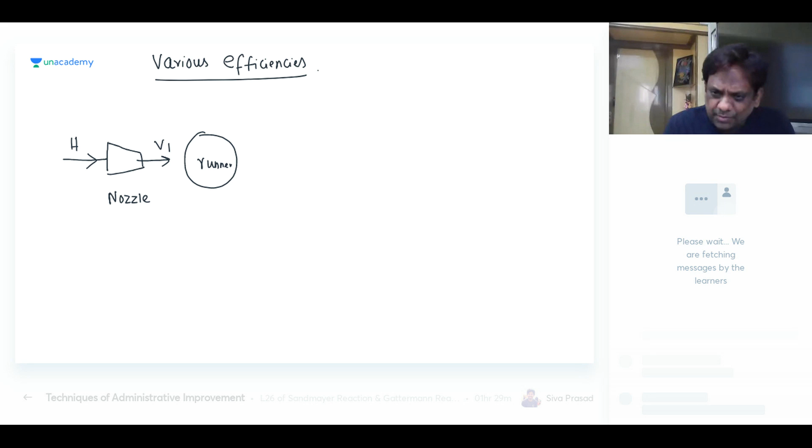From the nozzle, the fluid is entering the runner. I'm not showing the blades and all those details. This is the inlet to the runner. The runner is developing a power PR, and we call this the runner power.

Okay, this is runner power. From the runner, it goes to the alternator or generator, and finally this is my shaft power. So finally we have the output power, which is the shaft power. Now watch carefully.

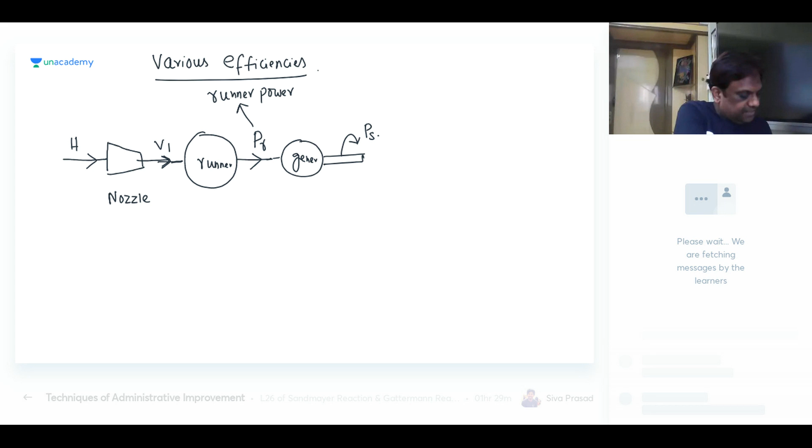Now I request everyone to stay cool and enjoy the class. Relax, relax. Okay, look carefully.

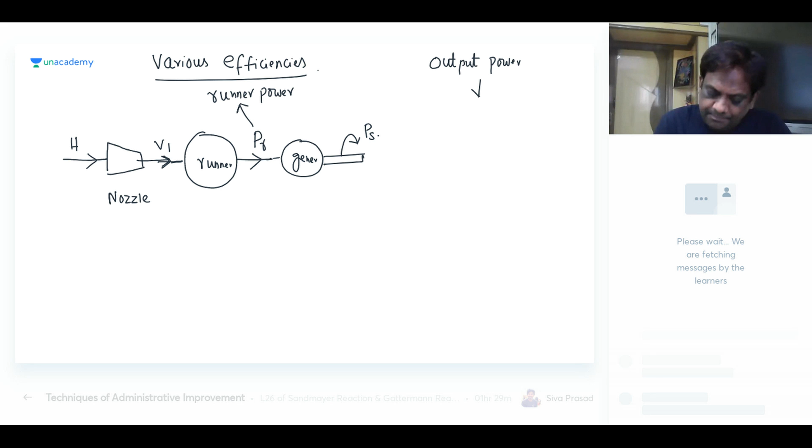Finally we are interested in, whenever we say turbine, it is the output power we are interested in. This is nothing but your shaft power. Okay, no problem, now look carefully.

I'll give you a simple example. What is the input? I already gave you that power is equal to WQH. I have derived this: power is equal to WQH. This is the input head, so therefore the input power will be equal to WQH. Now have a look at this.

There is one device, A, and there is another device B. Let us assume, I'm giving a small example: let the input to A be P1. Let A develop a power P2. And let B develop a power P3. No problem at all, B is developing power P3.

Now let's see, what is the efficiency of A, my dear students? The efficiency of A is output by input, that is P2 by P1. Now let's find the efficiency of B. For B, this is the input and this is the output, so therefore it will be output by input, that is P3 by P2.

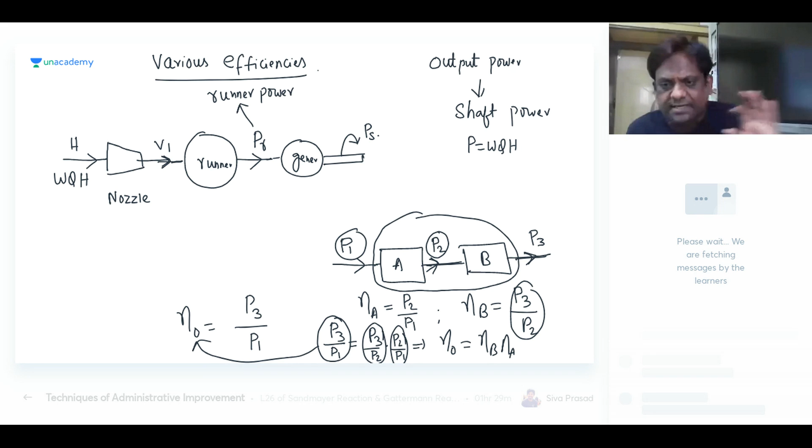My dear students, is this clear till now? Please tell me, till now is it clear? You are not saying anything. So I'll move ahead.

Look here, now watch carefully, stay calm. This is the nozzle, and the input is H, the head. So what is the input power? It will be WQH. You know well it is developing a velocity V1. Now where is this going? It is going to the runner, and the runner is developing a power PR.

Now I use one word, hydraulic efficiency. Now I am making every point crystal clear, but one must have patience for this.

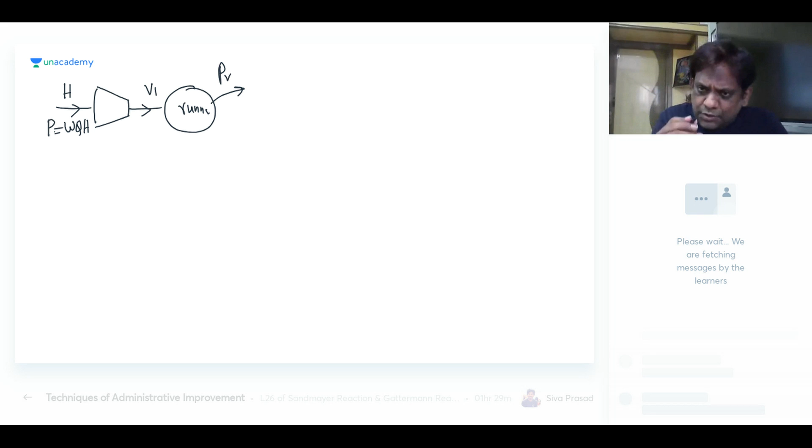Can you tell me what is nozzle efficiency? We have seen very clearly, for nozzle efficiency it is output by input. I will write this as V1 square by 2G as output head, and the input head is H. So this is my nozzle efficiency. I already explained this in my first or second class, I don't remember.

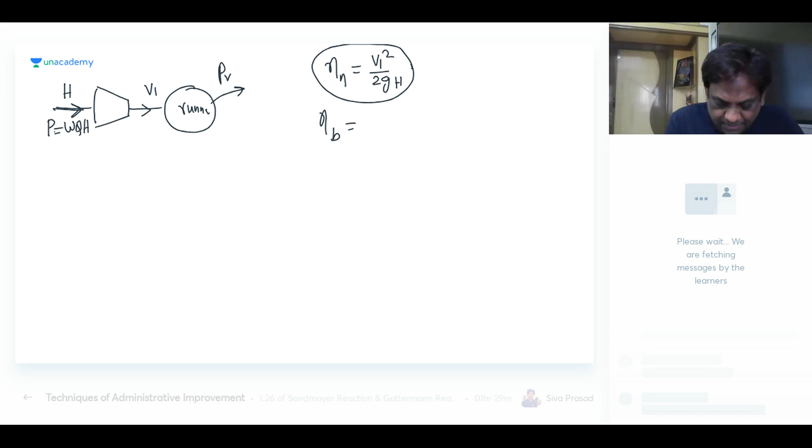Now, can anyone tell what is blade efficiency? I told you yesterday. This is the runner or blade. Runner or blade efficiency is the output. I want the blade efficiency of my runner. Where are the blades? On the runner. So it is known as runner efficiency or blade efficiency. The runner is developing power PR. So it is output by input. What is the input? Half M V1 square. We have already seen this. My dear students, is it clear? We have already seen this.

Now watch, I use one term known as hydraulic efficiency. Be a little careful. Now I use one term known as hydraulic efficiency.

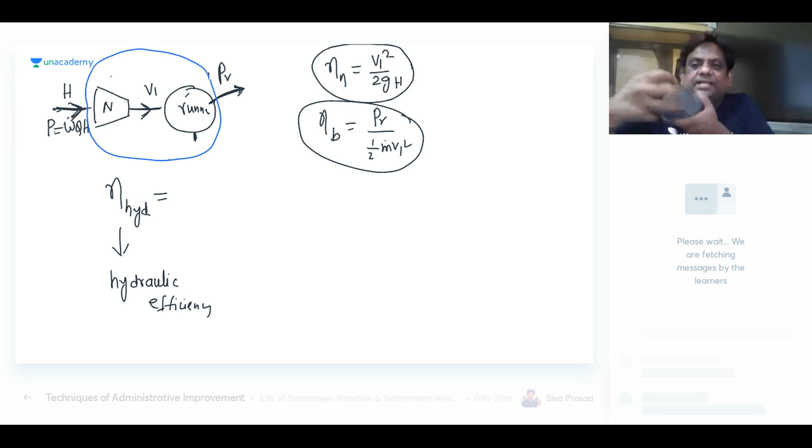That fluid will go. Now let us say this is the runner, so on the runner we have blades. It is developing power. So once it develops power, it causes the rotor to rotate. Once it rotates, what does it connect to? The generator shaft. Now output power will come from the generator shaft. There, there is no fluid action, it is all mechanical action. So that's why the hydraulic action is input to the nozzle. Then you may ask, sir, why are you taking the nozzle as part of the turbine? The reason is, in impulse turbines, we need a nozzle.

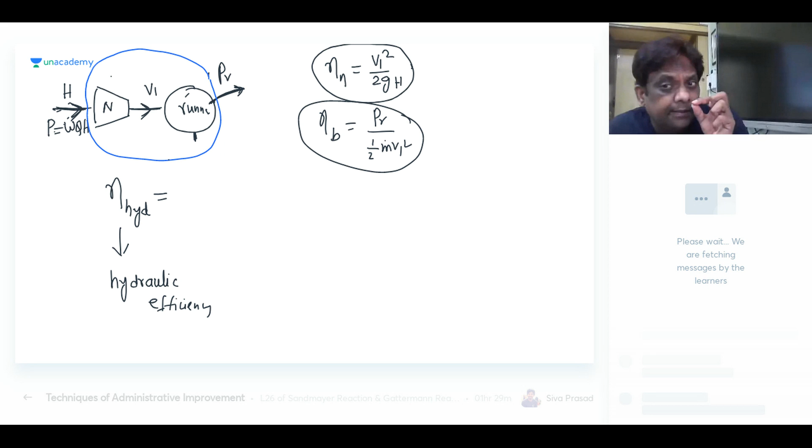Because of the nozzle, my complete pressure is converted to velocity, and with that velocity the fluid enters the runner blades. So this is the integral part.

Tell me about hydraulic efficiency, meaning this whole hydraulic action where fluid is entering and power is developed. What is the output power? It is the runner power. And what is the input power? This head - if this is power, then this should also be in power: P = WQH. And this is known as hydraulic efficiency.

This is known as what? Hydraulic. Why do we call it hydraulic? Because input is fluid action, and because of this fluid action, the power is developed. After this, we don't use the word hydraulic.

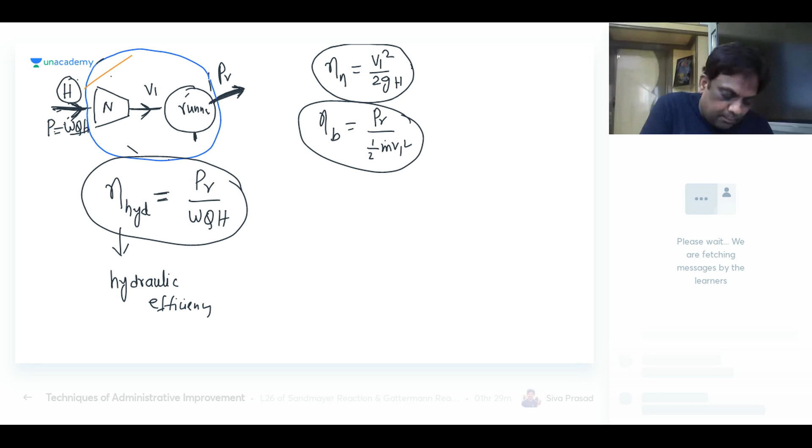Please observe, hydraulic efficiency is output from the runner. How much is the runner developing? PR. And what is the input that you are giving? Don't say sir this is the input - that is input for the blade only. For my complete turbine, I repeat, for this complete turbine, this is the input, and this is all fluid action. Because of the fluid motion only, the power is developed.

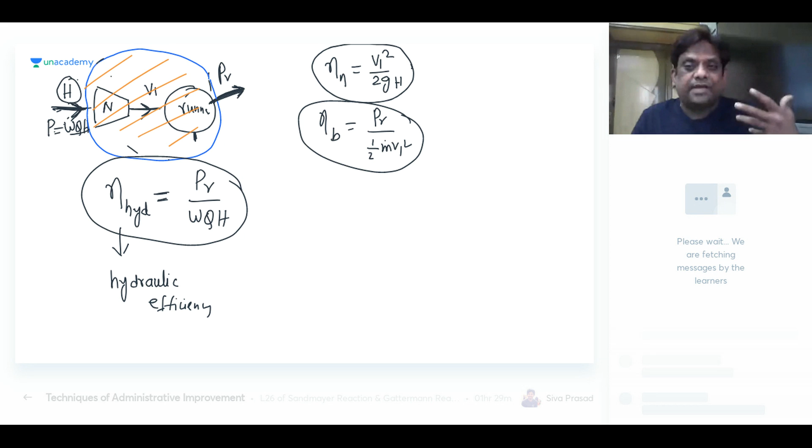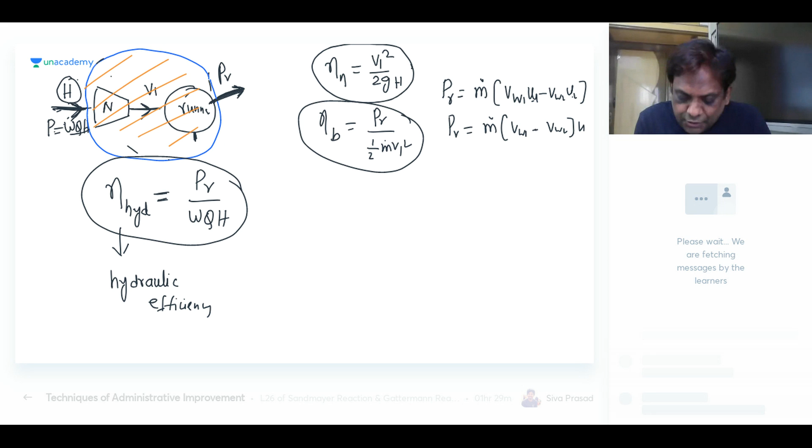That's why we call it hydraulic action or hydraulic efficiency. What is hydraulic efficiency? It is the ratio of runner power. Already I have derived runner power as M dot into, as I told you yesterday, VW1 U1 minus VW2 U2. But in Pelton Wheel, U1 and U2 are same, so take it out. So it will be VW1 minus VW2 into U. But I should write this as plus or minus. Why plus or minus? All this I had explained yesterday.

Please do not by-heart this. Today I'm going to do some questions wherein in one case it will be plus, in other case it will be minus. If a student is by-hearting, then they're gone. So please tell me, is hydraulic efficiency clear? You're not saying anything. Is hydraulic efficiency clear, my dear students?

Hydraulic efficiency clear? Yeah. Now, अब देखना. Udaya Rasakunda. Oh. Okay. Now observe here. Please observe here. Understand carefully. Okay, hydraulic efficiency is over.

Can I write this? Please observe, my dear students. Hydraulic efficiency has two components. Look here. This part is nozzle and this part is runner. So runner output, runner input - you call it blade efficiency. Nozzle input, nozzle output - nozzle efficiency.

But please observe, just now I gave you this. So this overall hydraulic has two components, nozzle and runner. So can I write hydraulic efficiency is equal to nozzle efficiency into blade or runner efficiency? Just now I have derived this. Overall, tell me sirs, is it clear, my dear students? All of you, is it understood? This is very, very important.

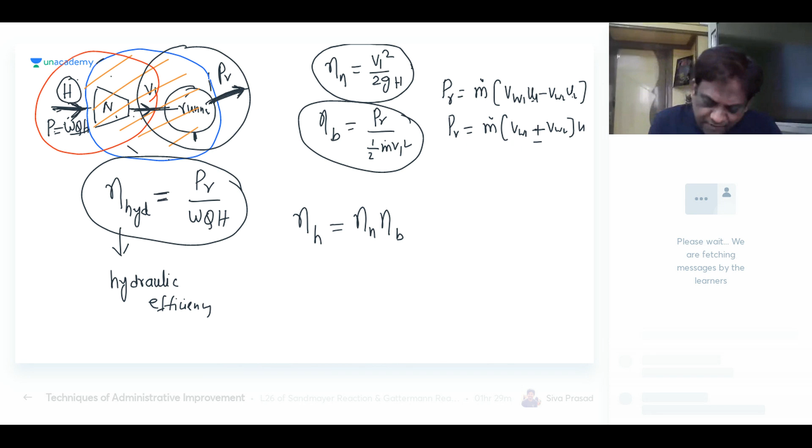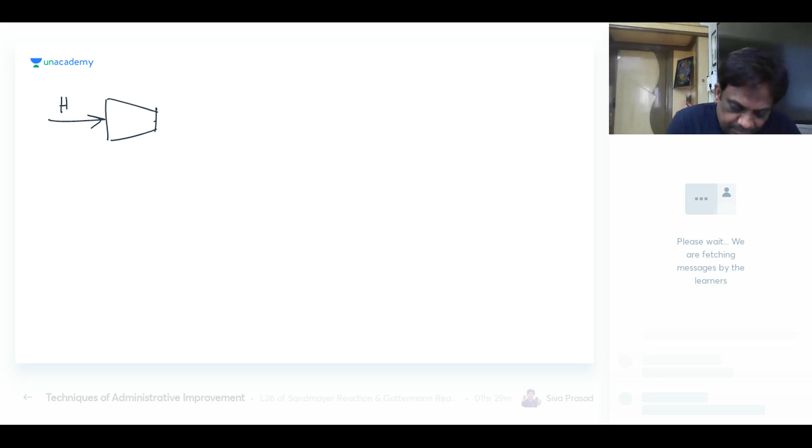Hydraulic efficiency is nozzle efficiency into blade efficiency. Let me tell you again, listen. This is the nozzle - this is the input, this is the output, this is the runner power. So output by input, this is blade efficiency. Output by input, this is nozzle efficiency. If you want total hydraulic efficiency, from this to this we call it hydraulic. Hydraulic is equal to nozzle efficiency into blade efficiency.

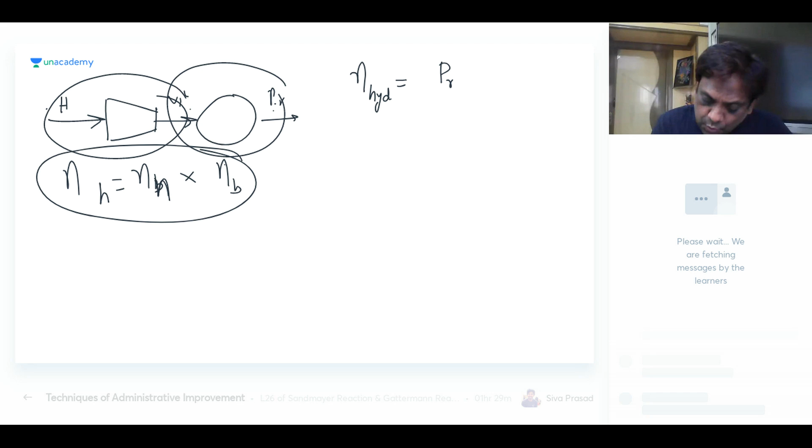All of you, have you followed? Excellent students of India, excellent. So what is the equation of hydraulic efficiency? The equation of hydraulic efficiency is runner power to the input power of the nozzle. Excellent, my dear students, excellent.

Now please observe here, understand carefully. From the runner, look, from the runner, all of you... okay, let's take it overall. And finally, thank you, Ankit.

My dear students, you are not interested in the runner alone. The runner is developing power, but that is connected to a generator shaft, the output shaft. So from the runner, it should go to the output shaft. My runner is developing PR - runner power - but that is connected to the output shaft.

We call this - always remember that in turbines, when someone uses the phrase 'the turbine develops 9,000 kilowatt', actually they mean nothing specific unless stated - it is actually shaft power. When nothing is mentioned, it is actually the final output shaft power. Understand carefully, it is the final output shaft power.

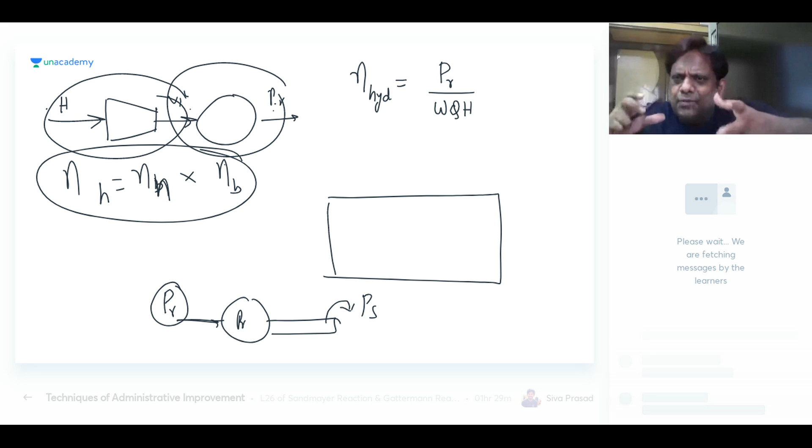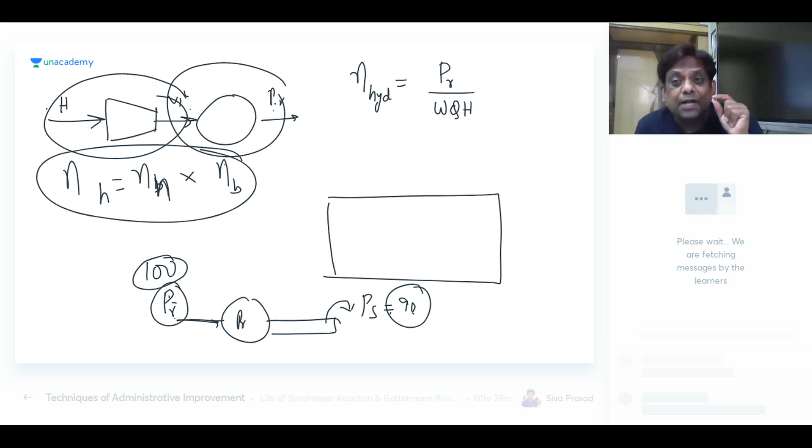तो अगर रनर 100 डेवलप कर रहा है तो रनर से आउटपुट शाफ्ट डेफिनेटली ये कम डेवलप करेगा, शायद 90. So these 100 is runner power, but finally you are getting only 90 to run the shaft. And these are known as mechanical losses.

Mechanical efficiency is equal to shaft power by runner power. अरे यार, shaft से कहां जा रहा है वो? देखो, runner से shaft, तो फाइनल शाफ्ट को घुमाना है. You have to rotate the final shaft. So runner is developing 100, but for causing the complete rotation, definitely there will be bearing, friction, all those losses.

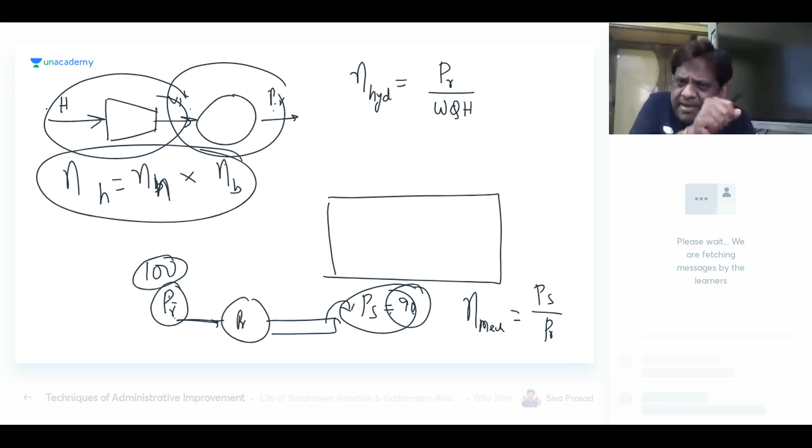So there will be a loss. So those losses we call it as mechanical losses. So what is mechanical efficiency, my dear students? Please be clear, my dear students.

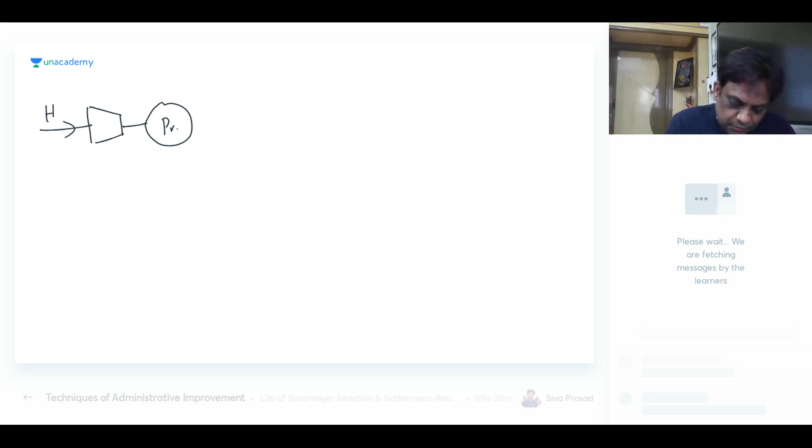देखो, this is nozzle. From the nozzle, it is runner. So runner is developing PR. I'll write very sequentially, don't worry. This is H and that power will be WQH.

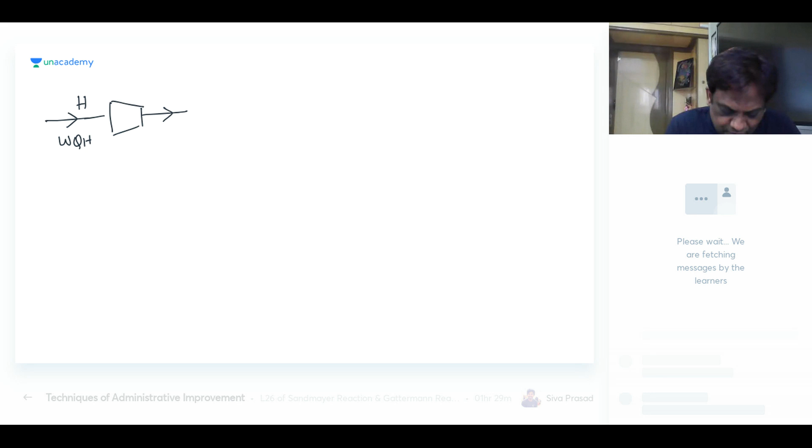Very good. Now, then it is moving to nozzle. Nozzle से velocity V1 आएगा. अब वो कहाँ जाएगा? Runner. और runner develop करेगा PR. और runner develop करने के बाद ये देखो generator और जो है वो shaft.

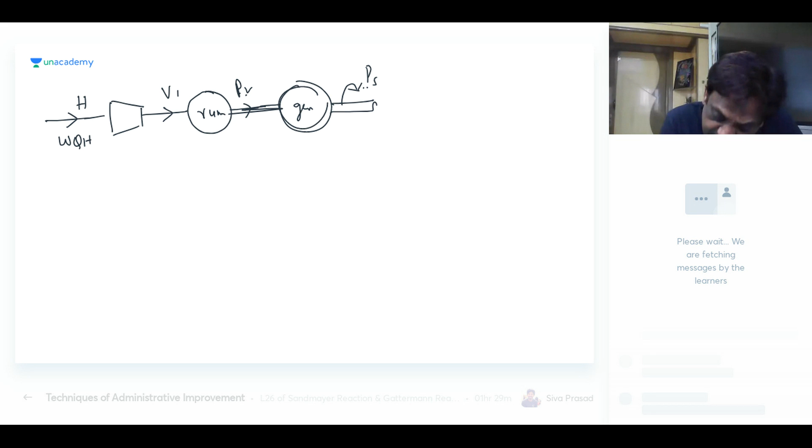Let us say this is the shaft power. So finally we are interested in shaft power. तो ध्यान से सुनो, रनर से जो शाफ्ट को जा रहा है, these are mechanical losses. So therefore यहां से यहां, please observe.

So now I write यहां से यहां, please let's draw this figure neatly. Okay, so mechanical efficiency, always remember efficiency is output by input. So देखो, this is the input to this device, this is the output. So output by input. PS is shaft power, PR is runner power. Very good. Now what is this?

देखो, blade efficiency. What is blade efficiency? Blade is runner power, blade efficiency. ये blade है. Output by input, half m dot v1 square. And if it is nozzle, my dear students, if it is nozzle, v1 square by 2g, it is output head and inlet head is h.

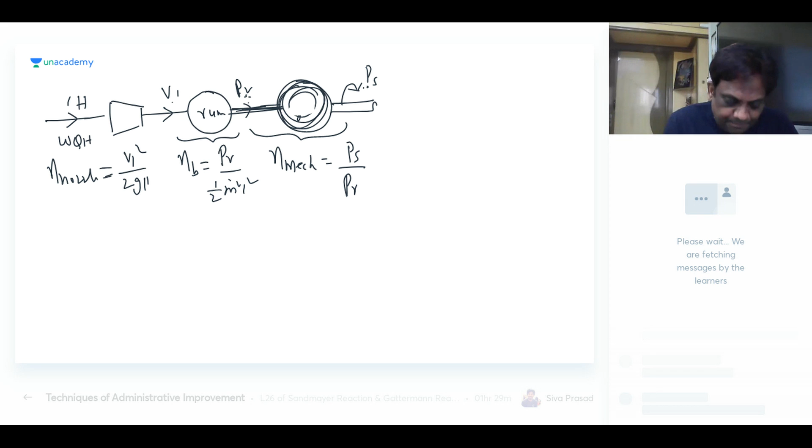So ये यहां से यहां तक we call it as hydraulic efficiency. यहां से यहां fluid है. Now there is no fluid here. I don't use the word hydraulic. There is fluid here. This is hydraulic. So hydraulic is equal to nozzle into blade. So hydraulic is equal to, for hydraulic, this is the output, this is the input, that is PR by WQH.

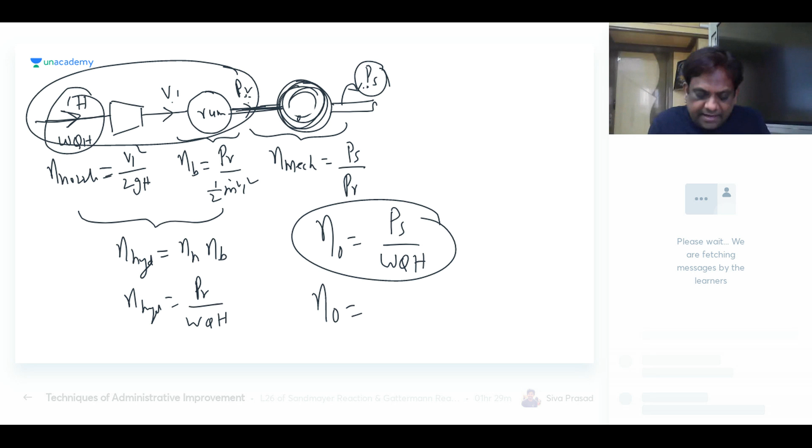Now observe here. So overall efficiency, already you know. Overall is, इधर देखना बेटे, overall final output, actual input. If this is in power, the denominator should also be in power. So final output is PS shaft power and the input is WQH. And this is the overall efficiency. So I can write overall is equal to, this is all hydraulic, this is mechanical, this is hydraulic, this is mechanical. So therefore it will be hydraulic into mechanical.

But already in hydraulic we have nozzle, blade. Already in hydraulic you have nozzle and blade into mechanical. This is my overall efficiency.

All of you, have you followed? अरे यार आप कुछ नहीं बोल रहे. All of you, is it clear? I'm very sorry, आप लोगों को आ रहा है या नहीं? All of you, is it clear? And some of you are attending casually, I know. Some of you are attending without any interest. All of you, is it clear?

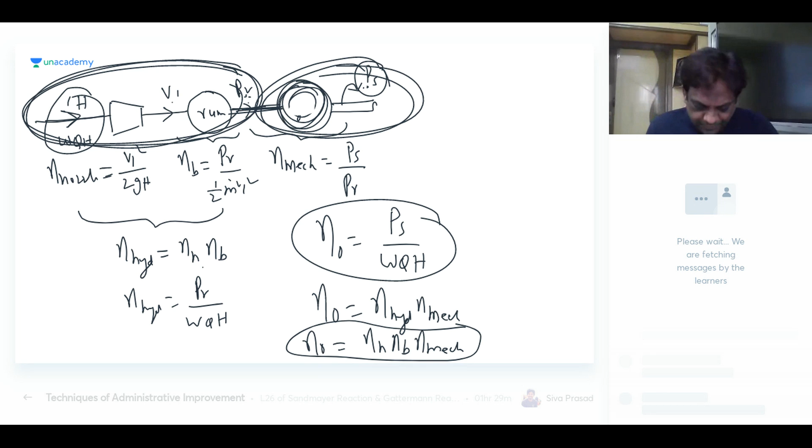फिर से बता रहा हूं सुनो. Please listen, because this is the point where students commit mistakes. देखो, it is head H. अगर power चाहिए तो WQH. Okay, it is developing V1.

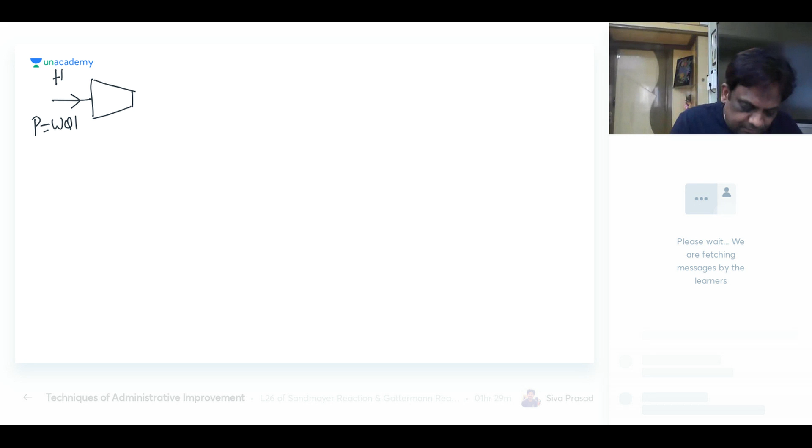So what is from here to here, you call it as nozzle efficiency. Here to here nozzle, and it will enter blades or runner means, and this is developing PR. यहाँ से यहाँ, these are blades. It is blade efficiency. And these put together, ये पूरा we call it as hydraulic efficiency. यहाँ से now it is shaft power.

So this is mechanical losses, mechanical efficiency. So this completely is overall. Overall can be written as mechanical into, ये दोनों लिए तो hydraulic आएगा, hydraulic. So अगर please observe mechanical, अगर hydraulic चाहिए तो it will be nozzle into blade.

All of you, are we clear? All of you.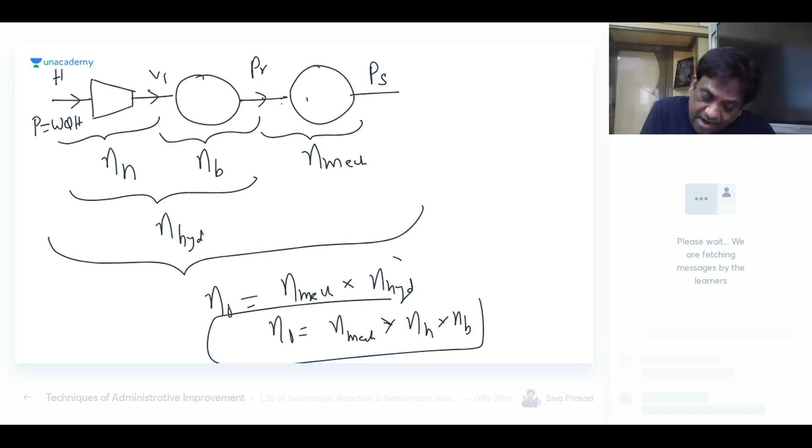Yeah, Uday, I'm in class, special class. Yeah.

Now please observe. The runner is making the shaft rotate. From the shaft we have the final generator, the final shaft. Please observe, these losses are mechanical losses.

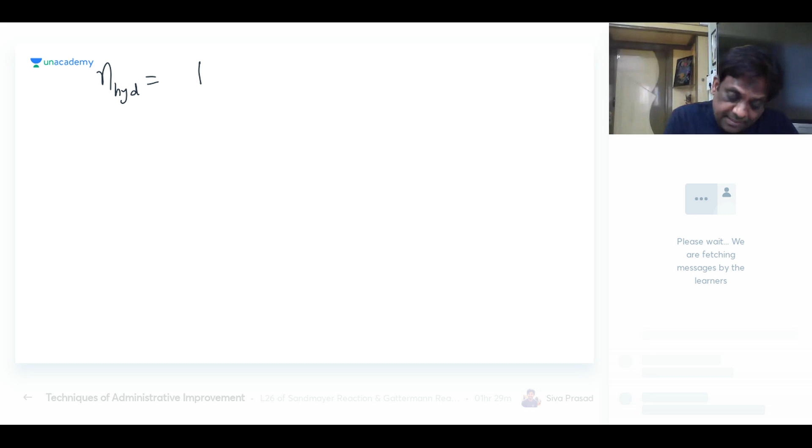So finally, what is hydraulic efficiency? It will be the runner power, hydraulic runner power, by WQH. I repeat, my dear students, look here. Hydraulic efficiency is runner output by WQH.

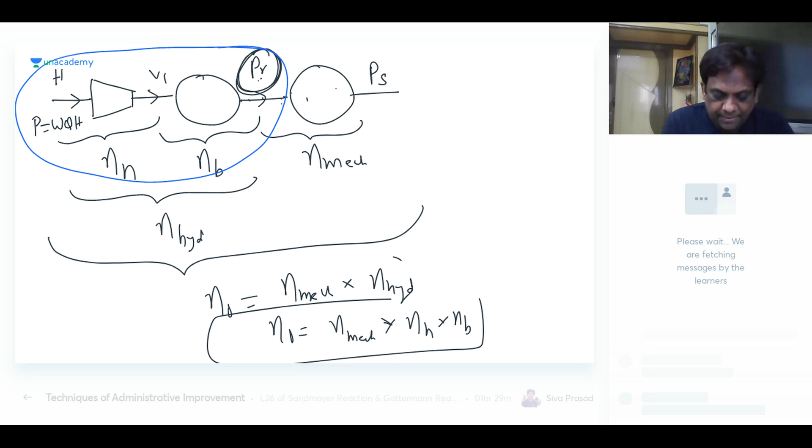And always remember overall efficiency. Can anyone tell what is overall efficiency? It is final shaft power by input, where input is WQH, and H is the head at the inlet to the nozzle.

Are we clear? Remember these two equations. Overall efficiency is hydraulic efficiency into mechanical efficiency. Do not worry, I'll come up with generator efficiency in my numerical, and I'll remove that confusion if someone has it.

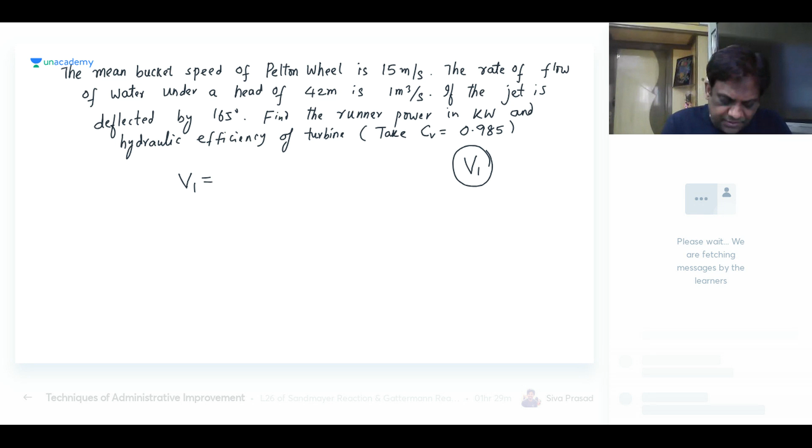Now please observe here. Already in my earlier classes, I don't know if you remember, I gave you V1 is CV root 2GH. That's why I tell you to attend classes regularly. So this equation I gave already in my earlier classes of Pelton Wheel. Is it clear, my dear students?

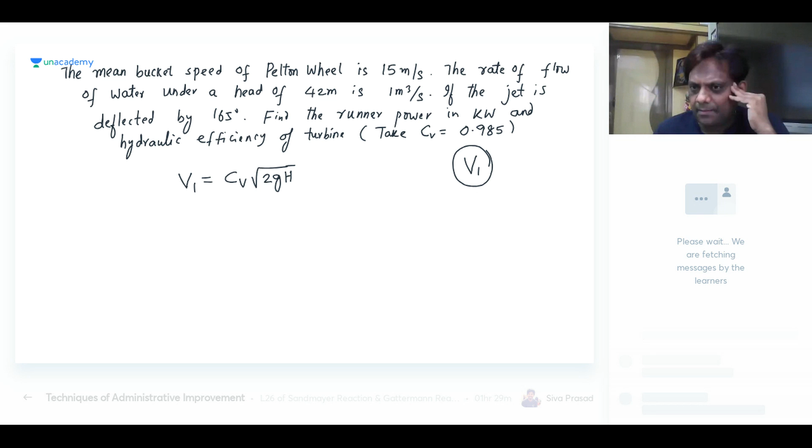Tell me, is it clear? I had told you this equation because I gave the link between nozzle efficiency and coefficient of velocity. Do you remember? I gave this in the first class. Thank you. In the first class.

Look, if CV is not given, take it as 1. If CV is given, take that value. If not given, take it as 1. V1 is equal to... can anyone tell the meaning of V1? I said the meaning of V1. It is the velocity with which the fluid is coming from the nozzle. It is known as jet velocity or spouting velocity.

CV is given as 0.985, under root of 2G. Keep calculators ready. Look, the head is already given. Does something strike you? Looking at the head, do you feel something? Please, looking at the head, do you feel something?

I felt something just by looking at the head. I told you Pelton wheel is a high head turbine. So for Pelton wheel, head should be greater than 250 meters. But here head 42 is given. Observe carefully, and there are practical difficulties of using low head for Pelton wheel.

But anyway, values are given, so let us take it. So can anyone give me the value of V1? Anyone? Correct? Everyone ready? Be ready with calculators. 28.27 meters per second. Excellent. Remember this, okay, no problem at all.

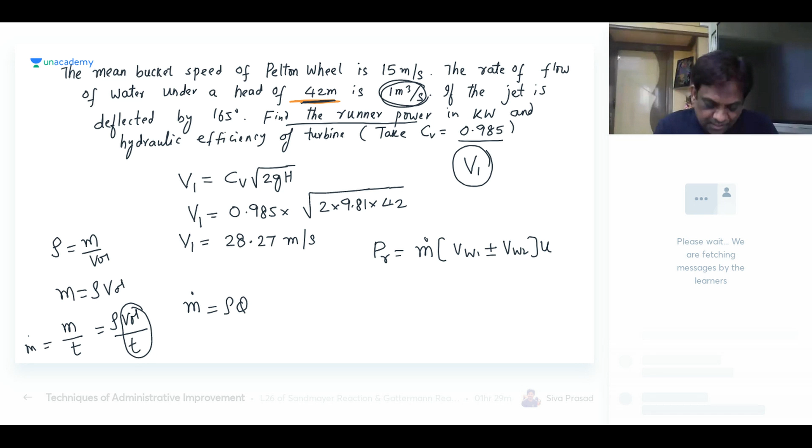So mass rate m dot is rho into discharge Q. Already the discharge is given as 1 meter cube per second. So therefore mass flow rate is equal to, the fluid is water, so the density of water is 1000 kg per meter cube, and the discharge Q is 1 meter cube per second. So meter cube is gone, kg per second. So you will get a mass flow rate of 1000 kg per second.

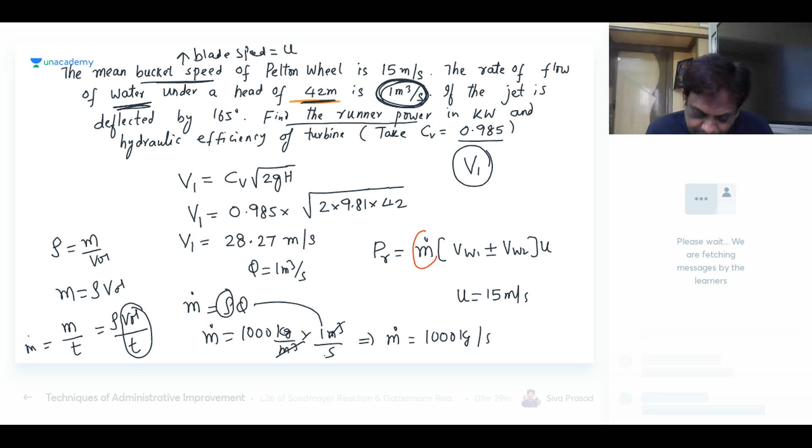Look at the bucket speed, my dear students. Bucket speed means blade speed, designated with U. So the bucket speed is 15 meter per second. You know m dot, you know U. The only problem is VW1, VW2.

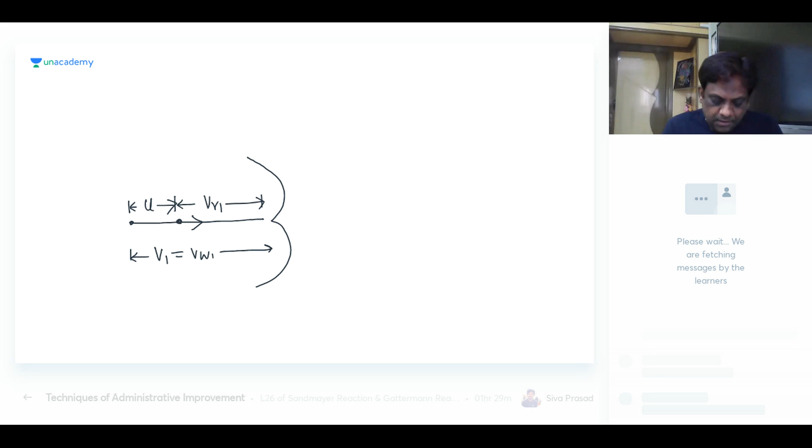If you draw triangles, my dear students, try to draw. In my last class, I told you V1 is equal to VW1. This is our U, I'm not writing U1, U2, since in my last class I explained U1, U2 are same. So VW1 is equal to V1. What is V1? 28.27.

So there is no problem with VW1, we have just calculated it. The only problem is VW2. Have a look at this, let me calculate.

He gave jet deflection angle as 165. What does it mean? This is our beta 2, because the fluid is entering and deflecting. So this angle is 165, and this blade angle will be beta 2. What is blade angle beta 2? It will be total 180 minus 165. So the blade angle is 15 degree.

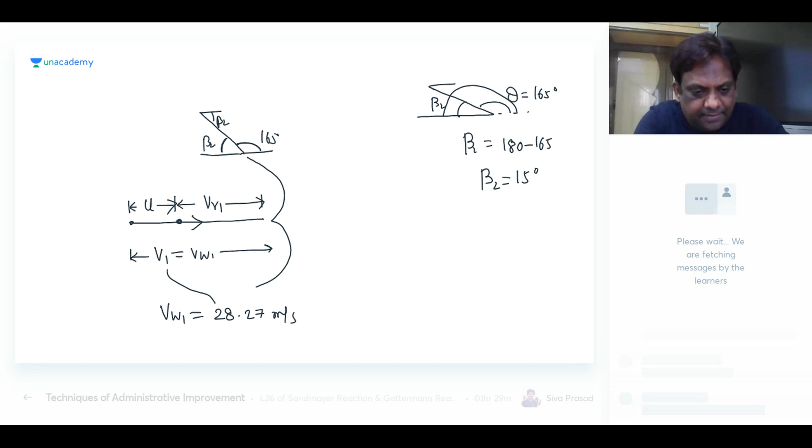Are we clear? Is the logic clear to all of you? Okay, nice, fine. Now one more concept, please observe here. Let me try to draw velocity triangles.

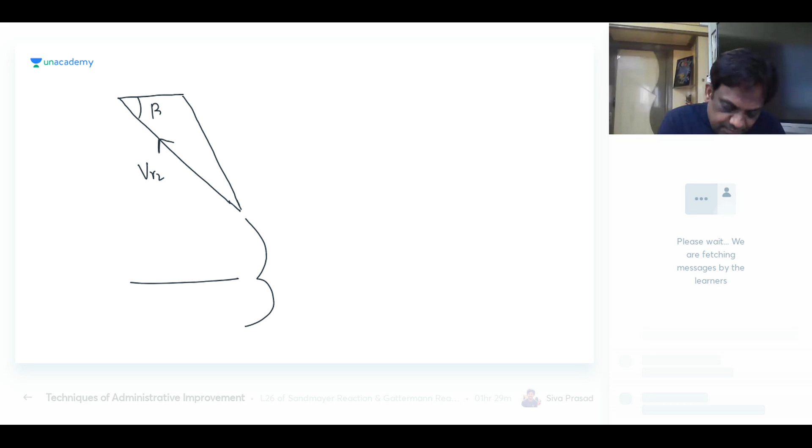I don't know if this exit velocity triangle is correct or wrong, but this is VR2, this is beta 2, this is U. Already you know U is given - blade speed or bucket speed is 15. This is 15.

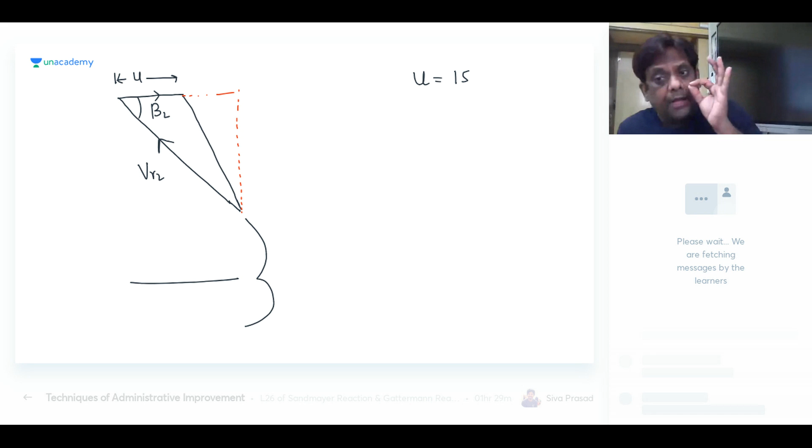Question, let me calculate. I have drawn a triangle, but honestly I do not know whether my triangle is correct or not. I'll ask you one question - please answer, can you tell me this length?

This is VR2, this is beta. Can I write this as VR2 cos beta 2? This is VR2 - I want this length. So let me calculate VR2 cos beta 2.

This is the opposite side, this is the adjacent cos side. Let us calculate VR2 cos beta 2. All of you look - in this problem, blade friction factor or blade friction coefficient is not given.

So actually K is equal to VR2 by VR1. Yesterday I explained everything - when it is not given, it is logical to take this value as 1. When it's not given, we don't take friction, and therefore VR1 is equal to VR2.

Whenever it is not given, you take it this way. Now observe - can anyone tell what is VR1 from this triangle? If you want VR1, it will be V1 minus U. So VR1 equals, V1 is already known - we calculated V1 as 28.27. And U is 15, so VR1 is equal to 13.27.

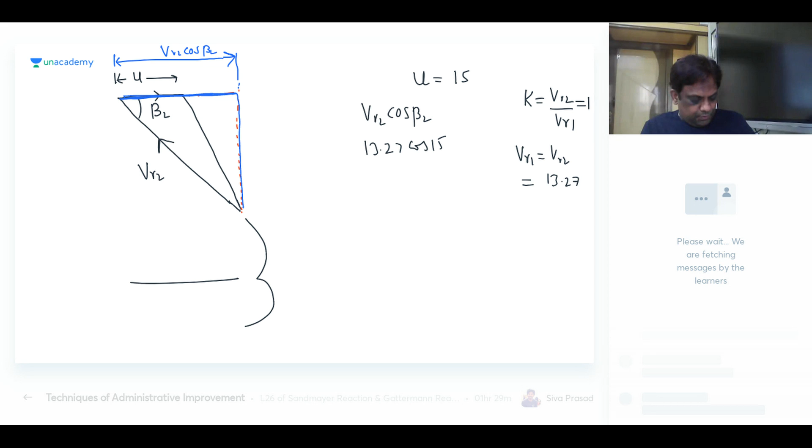Cos 15 into 13.27 - how much is it coming to? 12.81. So this length is 12.81. This length, VR2 cos beta 2, is 12.81, approximately 12.82. This is the total length, but what is U?

U is 15. What is U given as? 15. Oh my God, so this triangle is absolutely wrong. Can anyone tell why it is wrong? Because this should be 15, but already this is 12.82. If this is 15, it should come out like this.

So this will be my velocity triangle. This 15 should be greater than 12.82, so my triangle is wrong. Please understand carefully - that is the beauty of the question. If you remember, this is my total U, which is 15, and 15 is greater than 12.82. Do you understand?

Did you all understand? Yes, it is the third case. That's why students should not by heart. This is 12.82 and this is 15. When I had taken the earlier case, that was actually not correct. So that's why you should not by heart.

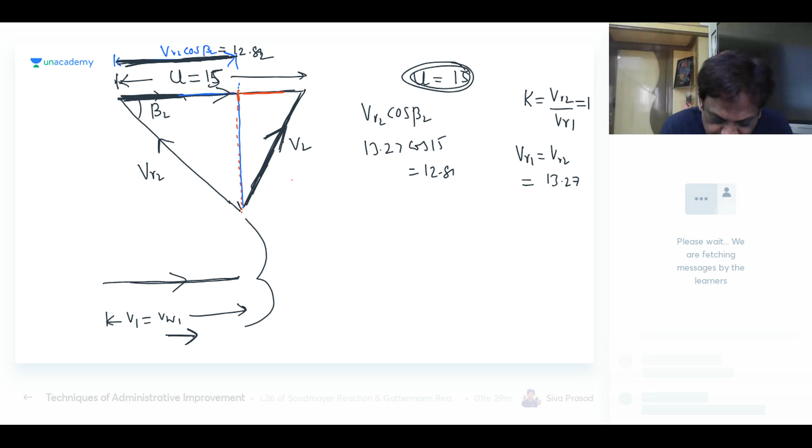Now please observe, this is my V1, which is also VW1. Can you tell me the direction of VW1? The direction of VW1 is towards right. V2 has two components. So this is my, now I write V2's this is my VW2. Look at the direction, towards right. This is my VW2.

Yes, and this is our VF2. V2 has two components, one is flow, one is whirl component. So can anyone tell what is VW2? Look here, this total length is 15, and this is 12.82. So from 15, remove 12.82, you get VW2. That is 15 minus 12.82, or VW2 can be written as VR2 cos beta, sorry, U minus, I will write this.

So this can be written as U minus, this total is U minus VR2 cos beta 2, and that is turning out to be 2.18 meter per second. Can you tell me the direction of VW1 and VW2? VW1 is in the right direction, VW2 is also in the right direction. So don't use plus. When are you using plus? Minus of minus is plus.

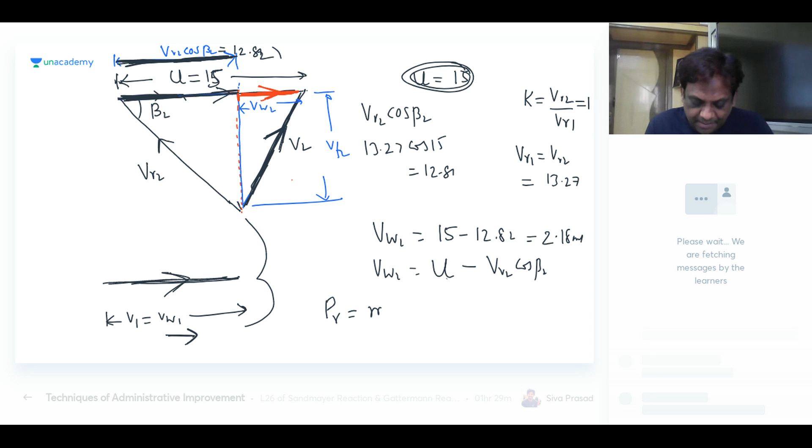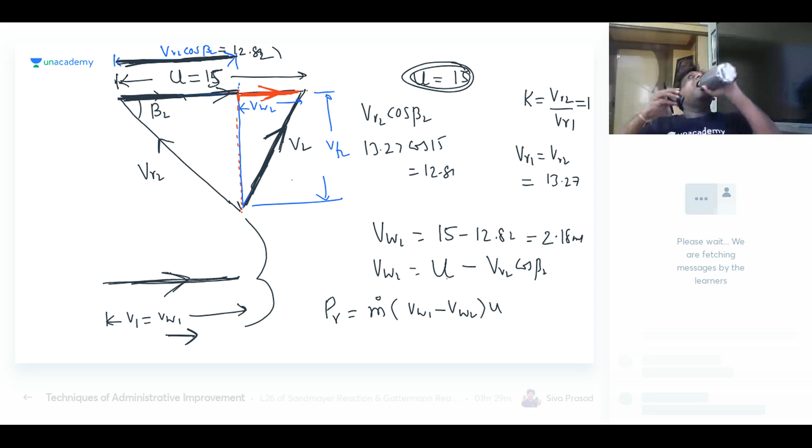So now I use the equation: runner power is equal to m dot into VW1 minus VW2 into U. I should use this equation. Please tell me, are we clear? Is the question clear, my dear students? Please tell me, is it clear? It should be crystal clear to you.

Thank you. So runner power is equal to m dot. Just now you have calculated 10 power 3, 1000 kg per second, into VW1. Already VW1 is known, 28.27. VW2 is 2.18, and velocity U, blade speed, is 15.

Let us check the unit. Units are very important. M dot is kg per second. VW1 minus VW2 is difference in velocity, so it will again be velocity, meter per second. Again this is meter per second. Now look at kg meter per second square, which is Newton. There is meter by 1 second. Newton meter is joule, joule per second is watt. This will be in watt.

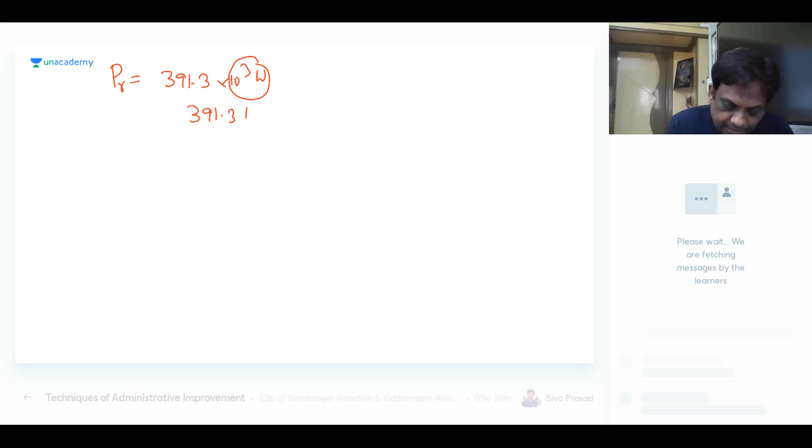If you divide by 1000, you'll get the answer in kilowatt. So therefore, how much is the runner power coming out to be? 391.3 into 10 power 3 watt, or 391.3 into 10 power 3 watt will be kilowatt. So we have calculated the runner power, and that is in kilowatt. Hope you have understood.

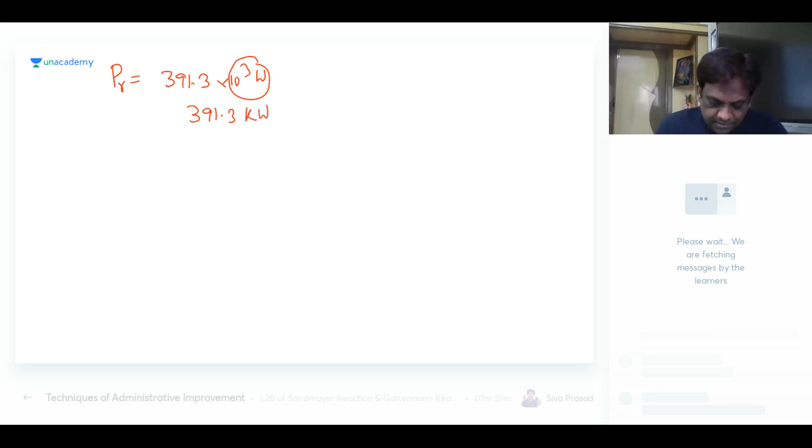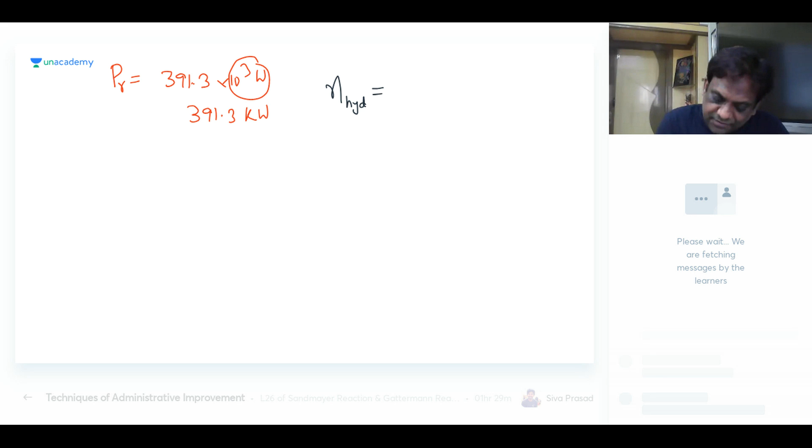Tawfiq, you gave the wrong answer initially. The problem is not over. Now what has he asked? He's asking hydraulic efficiency. So what is hydraulic efficiency? Already I gave you the equation. Hydraulic efficiency is runner power by WQH. Just now I gave you, and you have to be very, very cautious.

If this is in kilowatt, this should also be in kilowatt. For water, the specific weight is 9.81 kilonewton per meter cube, or 9810 Newton per meter cube. And the discharge is meter cube per second, and head is in meter. So Newton meter is joule, joule per second, kilo Newton meter is kilojoule, kilojoule per second is kilowatt. So hydraulic efficiency is runner power in kilowatt by how much?

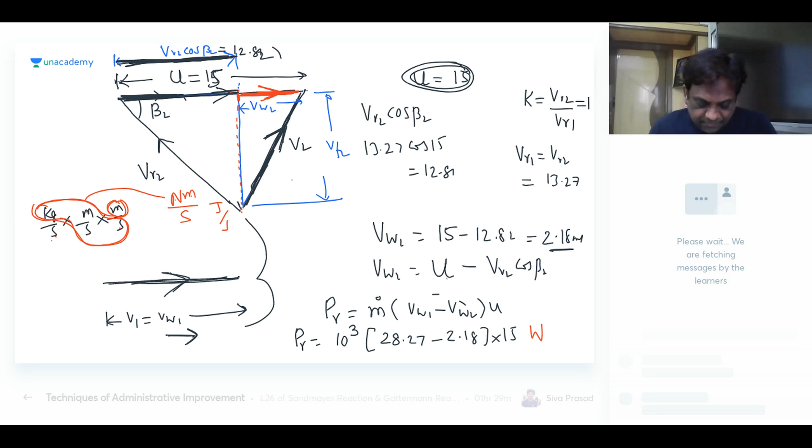391.3 kilowatt by W. What is W? 9.81. How much is Q given? Already Q is given, discharge is given as 1, into head. What is the head? Let's check once, head is 42 meter. So therefore it is 42. This is also in kilowatt.

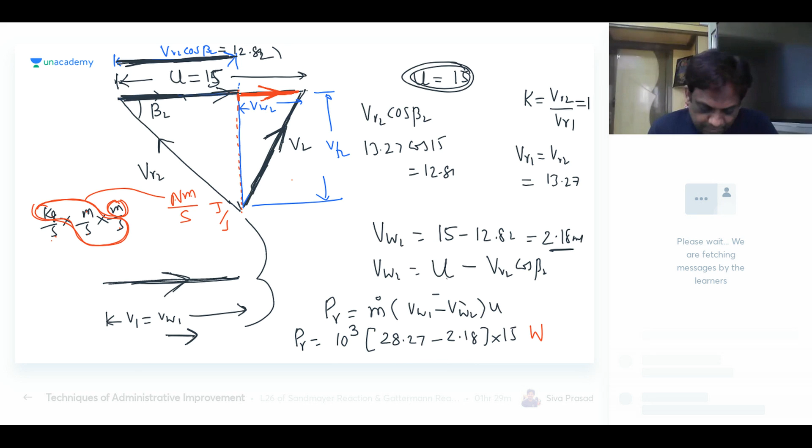Can you give me the value of hydraulic efficiency? How much is it coming out to be? 0.949, or if you want in percentage, it is 94.9%. All of you, have you followed, my dear students? Please tell me, is it clear? You are not saying anything at all. Is it clear? It's not overall, it is hydraulic. So that's the overall thing, okay, good.

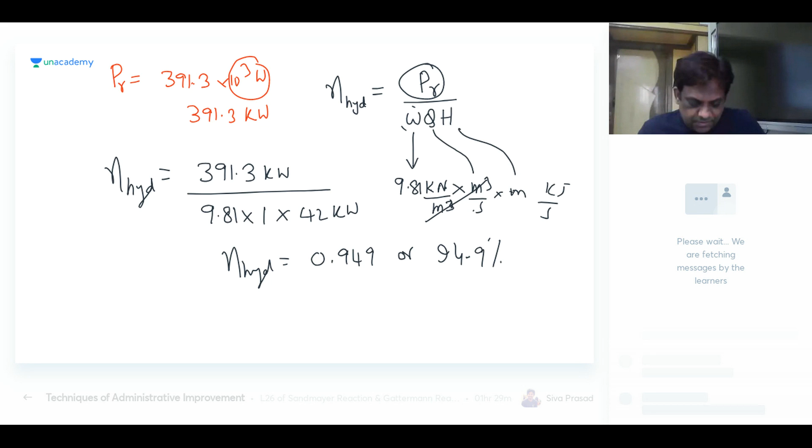Now please take this question. Next question, we will do it calmly. Whatever we are doing, let's do it perfectly. Okay na? Let's go.

Okay. A Pelton wheel is to be designed. The shaft power is 9560 kilowatt, and the head is 350 meter, and the speed is 750 rpm.

The overall efficiency is 0.85. The jet diameter means the nozzle diameter - the diameter from which the fluid is coming out, this is the jet diameter, and that will impinge on the wheel.

So the jet diameter is 1/6 of wheel diameter. Find the number of jets, and CV is given as 0.985, and the speed ratio rho is U by V1. This is known as speed ratio, and that is given as 0.45.

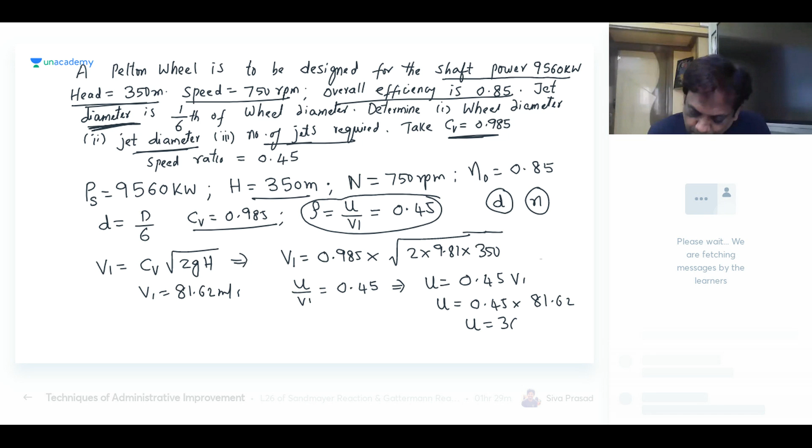It should be 81.62 meter per second. One more thing, the speed ratio is given, U by V1 is 0.45. So U will be equal to 0.45 times V1. U is 0.45 into 81.62. Can anyone give me the value of U? It is 36.73 meter per second.

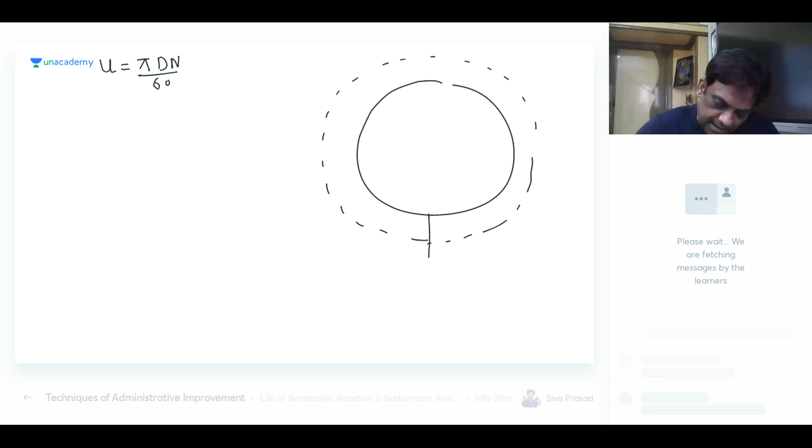I've told you very clearly, the blade speed is pi D n by 60. Why are you taking capital D? Because my blades are mounted on this rotor, and this is my capital D. If you want the speed U, it will be pi capital D n by 60. Capital D is the mean diameter of the wheel, not the jet diameter.

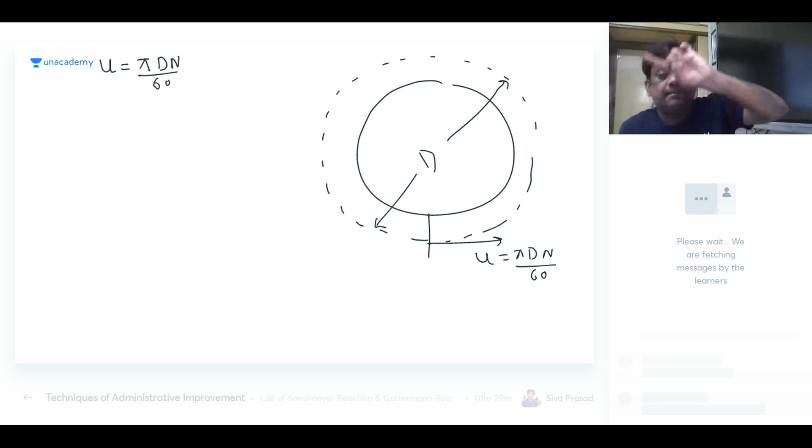So therefore, U is already known, 36.73, which equals pi into capital D, the wheel diameter, into speed n by 60. What is speed n given? 750 by 60. And you will get the wheel diameter. Anyone with capital D? Very good, 0.9.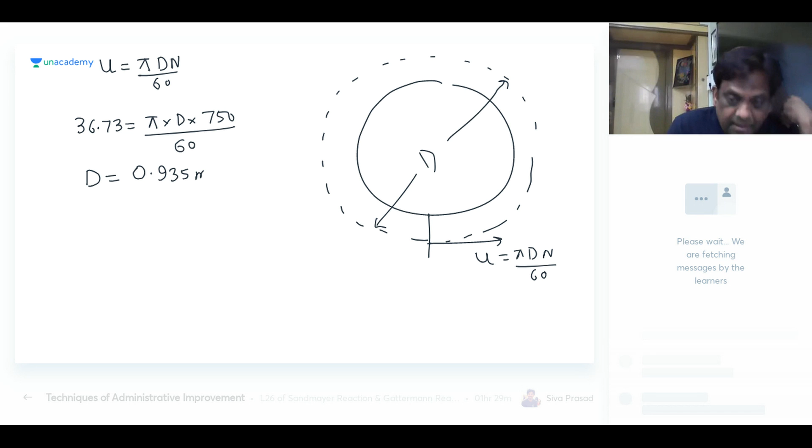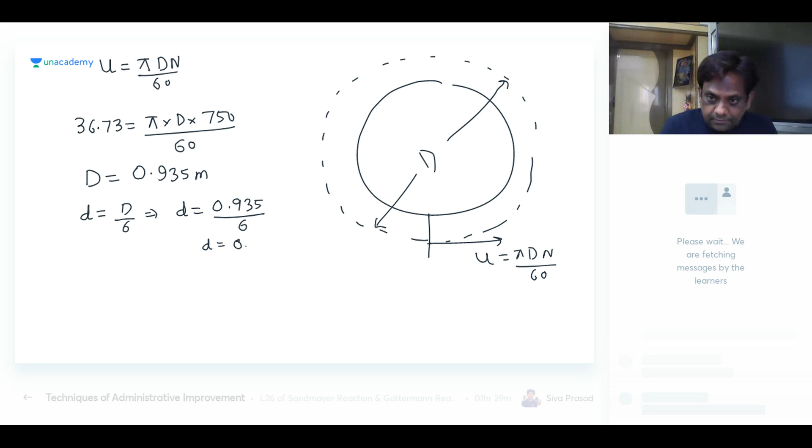But he is not asking wheel diameter, he is asking jet diameter. In the problem, he gives the jet diameter is 1/6 of wheel diameter. So it will be 0.935 by 6, and you will get small d. That gives 0.155 meter. So the first part is done. Now he is asking number of jets required.

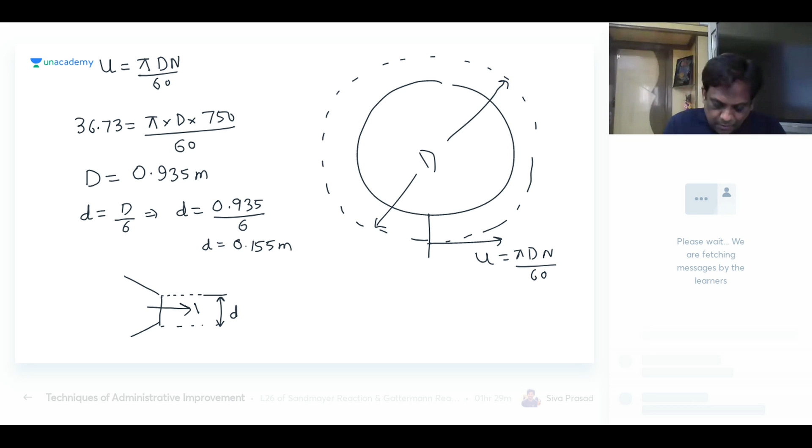One second, look and listen. This diameter is small d and it is coming out at velocity V1. Let us calculate discharge from single jet, and from that the wheel diameter is also asked. Wheel diameter, jet diameter - no issues, we'll find that too. Tell me, what is discharge from a single jet? Everyone knows discharge in fluid mechanics is area into velocity.

Look, where is it coming from - it is coming out through this nozzle. So discharge from a single jet: this is single jet, pi by 4 d square, it is the area of the jet and it is coming out at a velocity V1. So let us calculate from a single jet.

The area is pi by 4 d square into velocity V1. Please note the fluid is coming from the nozzle or jet, so you should take the nozzle or jet diameter, 0.155. Pi by 4, 0.155 whole square, and V1 is already known to me, 81.62. Can you give me the discharge from a single nozzle? It is 1.56 meter cube per second.

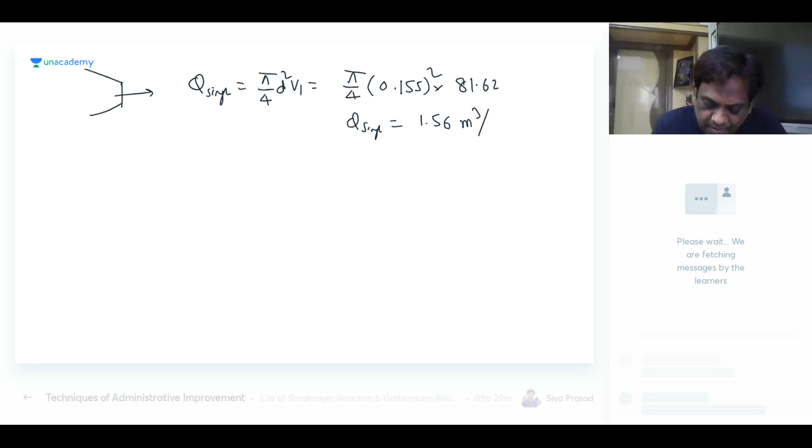But he is asking number of jets. We have calculated discharge from a single nozzle, now let us calculate total discharge. How do you get total discharge? From total power - all jets put together are developing the total power. So what we do is, is the overall efficiency given? Yes. You know that overall efficiency is shaft power by WQH. Let's look at that.

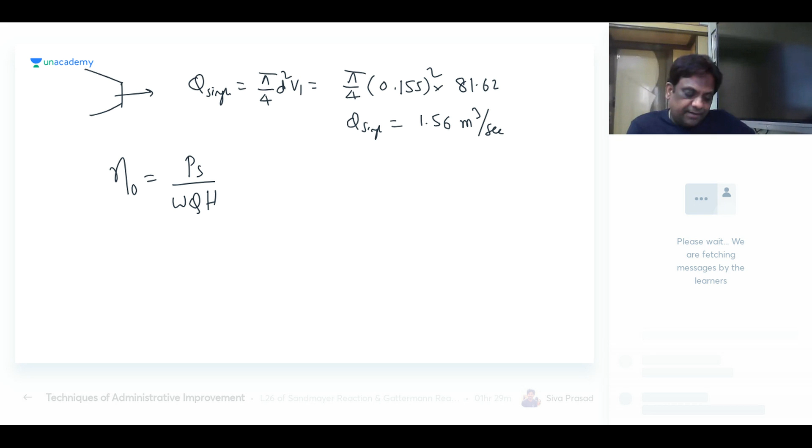When I use the word overall efficiency, it is the overall discharge. When it is overall, this will be the overall or total discharge. Please note that all jets put together are developing total power. This is the total power from all jets. So therefore, this will be the total discharge.

So you know the total discharge, and you know how much discharge is coming from a single jet. So if you want the number of nozzles or jets, since one jet gives this much discharge, calculate the total discharge, then single jet discharge, so total discharge divided by single jet discharge.

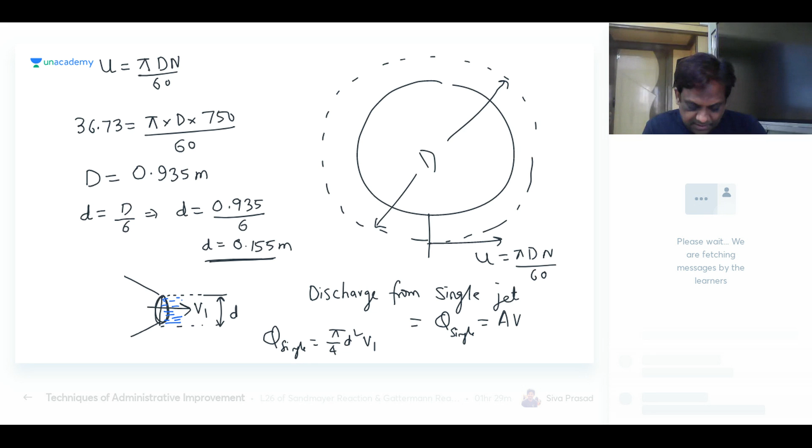How much is coming, 1.55 from a single point? What is the discharge from a single jet? 1.56, I'm sorry, 1.56. I think you are getting 2.0 something. So the number of jets is 2.

Please tell me, all of you, have you followed? Come on, say something, you're not saying anything.

And I'm leaving one question.

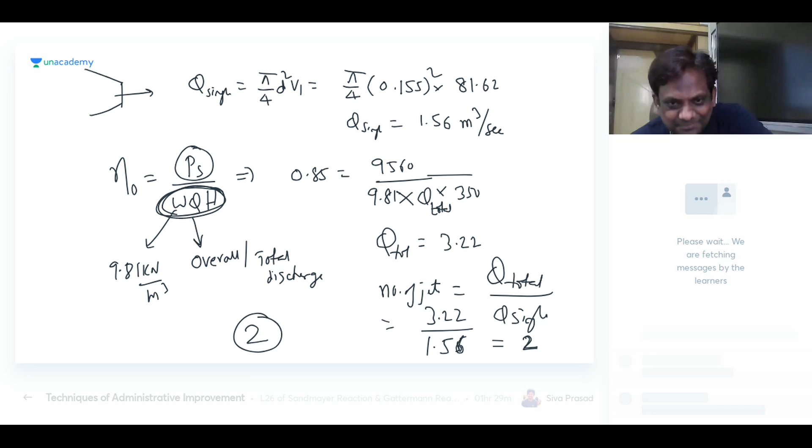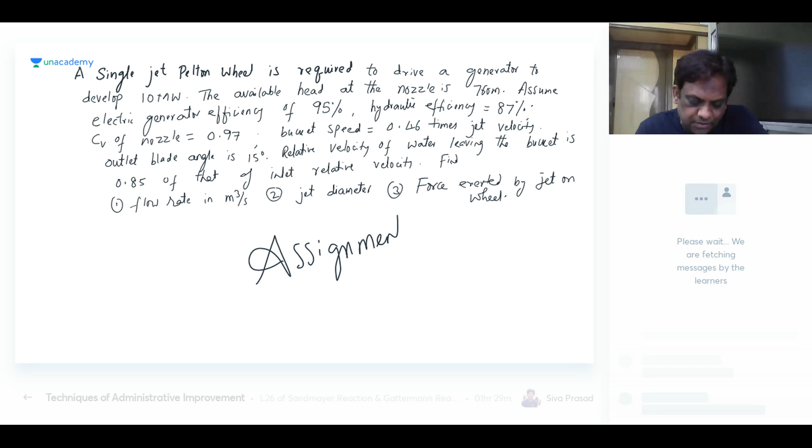But I won't use many because it may interfere. All these will be explained in depth in our regular classes. These are special classes, okay? Understand?